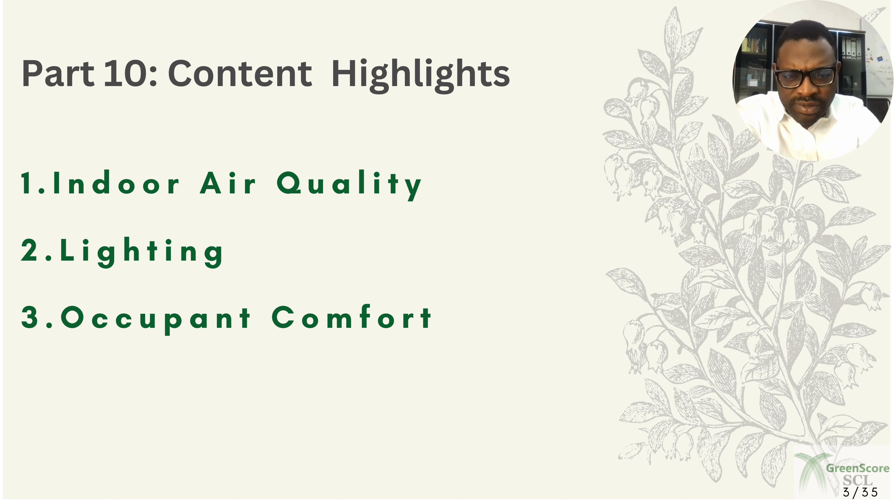For our content under this subject, we will consider indoor air quality, lighting as a subject, and also occupant comfort. So let's look at the overview.

For indoor environmental quality, the goal is facilitating health and well-being. This is a crucial factor when it comes to designing indoor spaces because a number of parameters such as air quality, lighting, thermal control, acoustic design, which has to do with sound, and occupant comfort are considered. These strategies are aimed to promote the health and well-being of everyone that interacts with that environment.

This is particularly important because with people spending 90% of their time indoors, the quality of that environment would affect their health, their wellness, and their productivity significantly. Meaning that if the indoor environmental quality design is poorly done, it will lead to reduced productivity, increased absenteeism, and decreased building value.

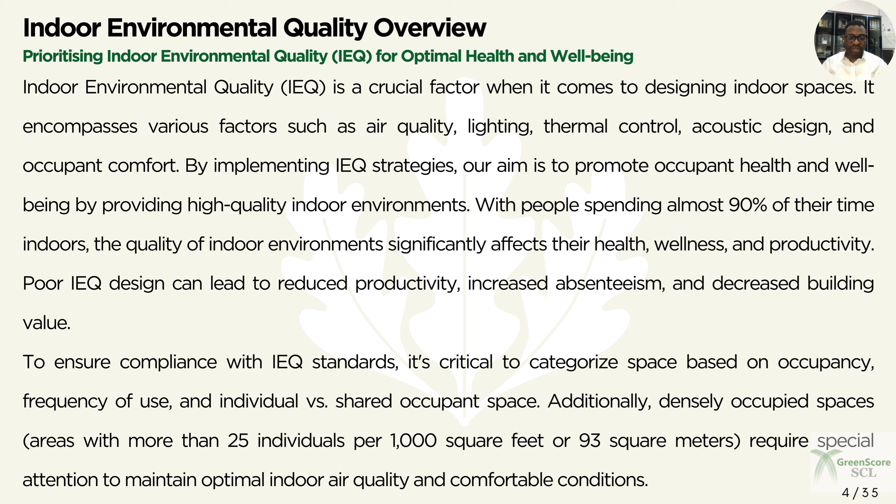And predictably, the triple bottom line benefits include personal comfort enhancement by maximizing natural daylight, natural ventilation, reducing CO2 and pollutant levels within the spaces, and of course, promoting cleaner and volatile organic compound free environments.

Economically, initial costs may be incurred, but you're able to mitigate expenses through proper allocation of thermal comfort and lighting controls, which decrease your expenses associated with replacing contaminated materials. So it's a win-win at the end of the day.

Socially, occupant health is protected, productivity levels are increased, and absenteeism is almost eradicated.

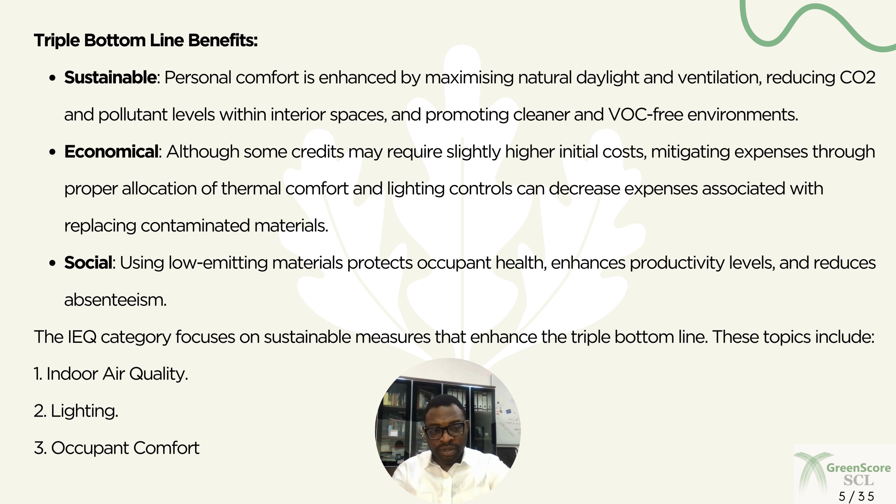The IEQ category focuses on sustainable measures that enhance the triple bottom line. The subject will include indoor air quality, lighting, and occupant comfort. So we'll take them now, topic by topic, as we progress with this lecture.

So let's start with indoor air quality. Maintaining indoor air quality is vital for ensuring the comfort, the health, and the productivity level of building occupants. In achieving this, the goal is to limit pollutant sources, provide good levels of fresh air, and follow the ASHRAE standards for the ventilation rate procedure.

Despite the higher energy consumption needed to achieve these standards, it's a necessary trade-off for ensuring a cleaner indoor environment that positively affects people's health and well-being.

It's also important to know that some areas in our buildings are more prone to hazardous substances and contamination, which means they will require special treatment to avoid exposing building occupants to polluted or contaminated air.

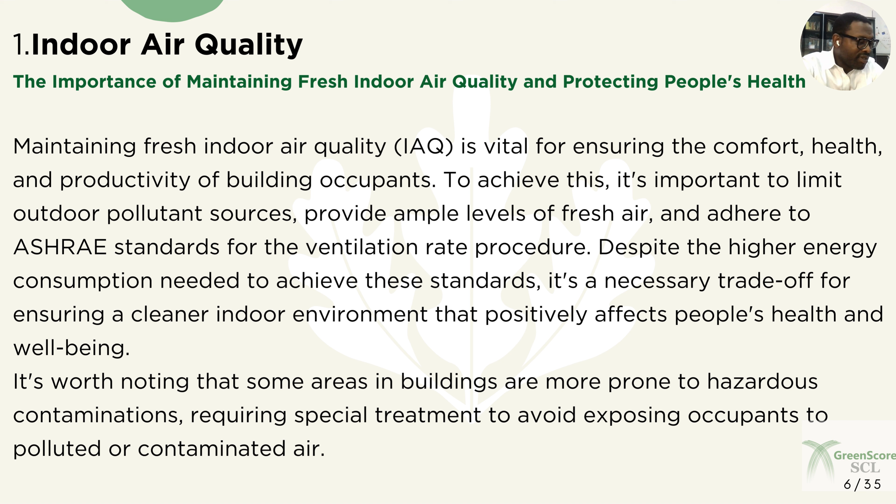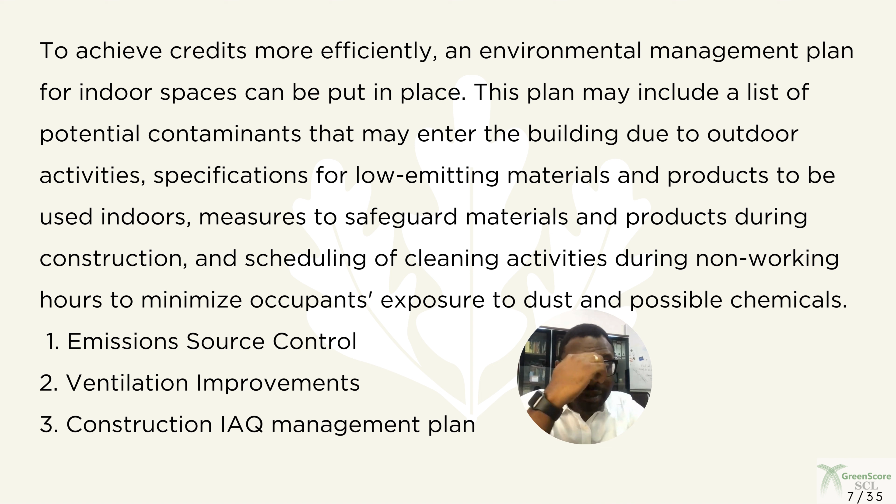To achieve credits more efficiently, you need to have an environmental management plan for indoor spaces that can be implemented. This plan would include a list of potential contaminants that you've identified that will enter the building due to activities around it. It will also include specifications for low emitting materials and products to be used indoors, measures to safeguard materials and products during the construction stage, and how you intend to schedule cleaning activities during non-working hours to minimize occupants' exposure to dust and possible chemicals.

So essentially, emission source control, ventilation improvement, and construction indoor air quality management plan are the major focus of indoor air quality.

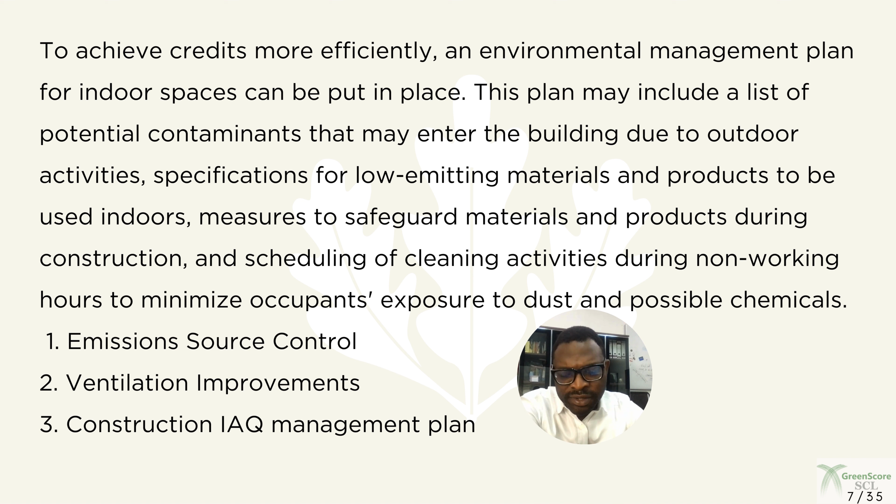Now let's talk more about emission source control. Engaging source control measures is very important for mitigating the creation of negative emissions. We need to note that every pollutant has distinct characteristics and properties coming from various sources. So below, we'll be looking at some of the most prevalent indoor pollutants.

We have volatile organic compounds, which are gaseous substances emitted from certain solid or liquid products or materials that contain various chemicals that can pose health risks. You find this in a variety of construction materials, for example paint, as well as sealants, adhesives, coatings, furniture, flooring, carpet, and so on.

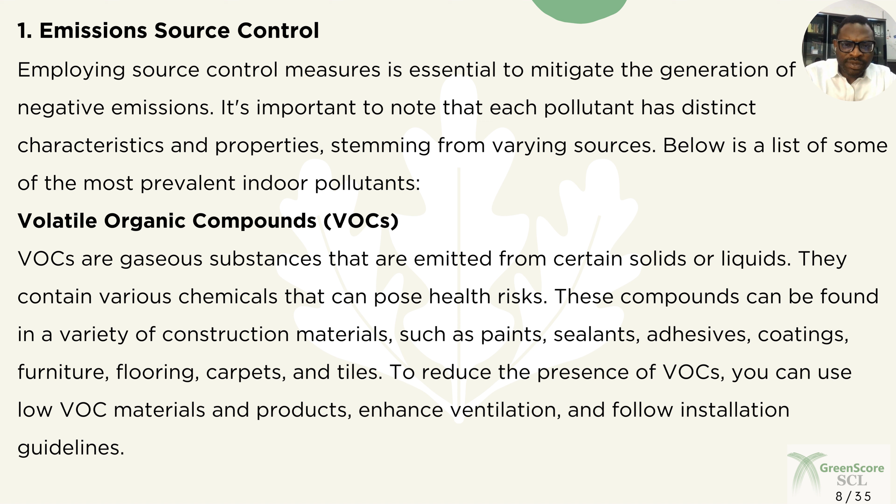So to reduce the presence of VOCs, you can identify and use low VOC materials and products, and enhance ventilation. Alright, secondly, we have carbon dioxide.

In the majority of buildings, humans are responsible for the largest chunk of indoor carbon dioxide. This is produced through respiration and metabolic processes. When these levels of CO2 are elevated, it is known to negatively affect the productivity of humans and the overall well-being. CO2 levels above 1000 parts per million (ppm) can have adverse health effects on humans.

So you need to take note of some of the references that have been made to specific figures to define what range is acceptable and what is not in LEED, so that you can speak to those questions when you come across them in the examination hall.

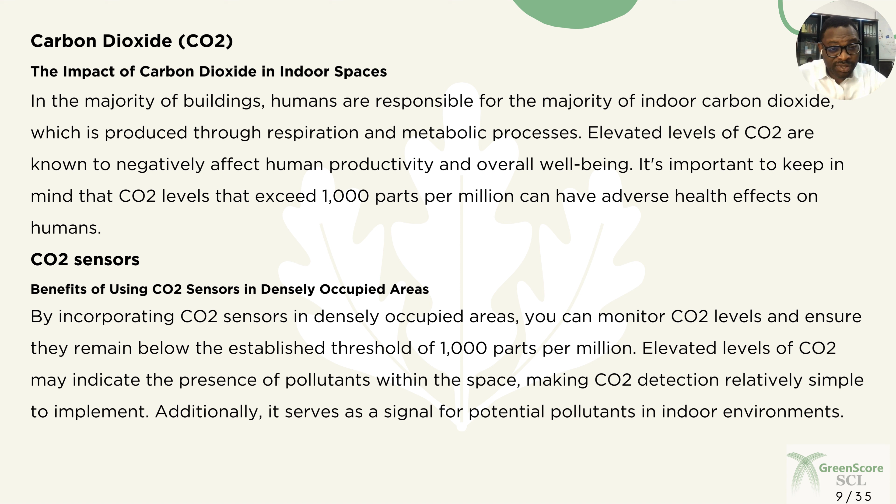And how do you control the carbon dioxide level? We have CO2 sensors, which are incorporated in densely occupied spaces to help monitor CO2 levels to ensure they remain below the threshold we made reference to, which is 1000 ppm. This is important for you to take note of.

Also, we have biological contaminants - indoor allergens like mold, bacteria, viruses, and other living organisms that can cause allergic reactions when you inhale them. They can grow in high humidity or moisture levels. We find that they often appear on interior walls, window sills, bathroom caulking, and moisture can also accumulate in insulation panels, drywalls, wood studs, plywood, and other areas.

So to reduce this, we are able to consider installing exhaust fans in rooms such as bathrooms, kitchens, and copy rooms, so that they can vent directly outside. Additionally, we can increase ventilation levels when necessary. These are part of the measures adopted to achieve this.

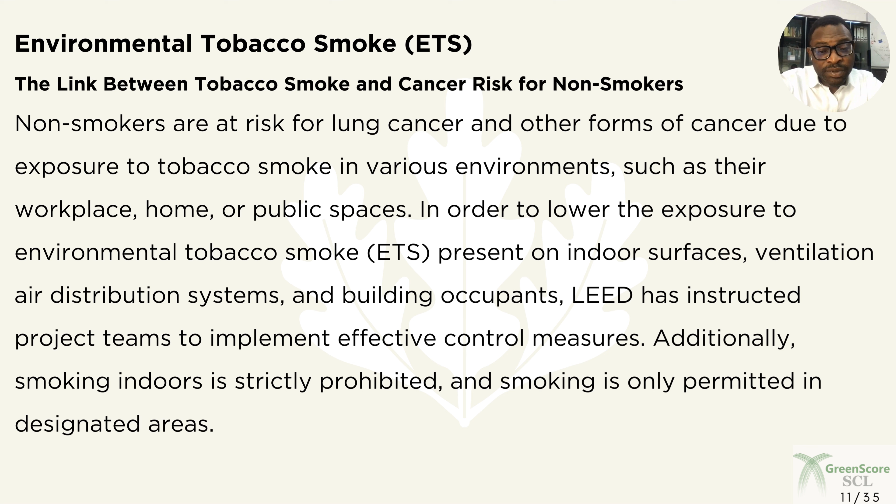Also, we have formaldehyde - a colorless, sharp-smelling gas, which is a common volatile organic compound used in the production of construction materials. This substance is linked to sick building syndrome (SBS), and it poses serious health hazards.

Formaldehyde is extensively used in manufacturing walls, especially wooden walls, cabinets, furniture. It's essentially used in creating the resin - urea formaldehyde resin.

This type of resin has raised many health and safety concerns, leading to the establishment of low thresholds for urea formaldehyde resin usage in composite wood and agri-fiber manufacturing processes. In complying with LEED policies, urea formaldehyde resin is prohibited and is replaced with eco-friendly options such as phenol formaldehyde and soy-based binders.

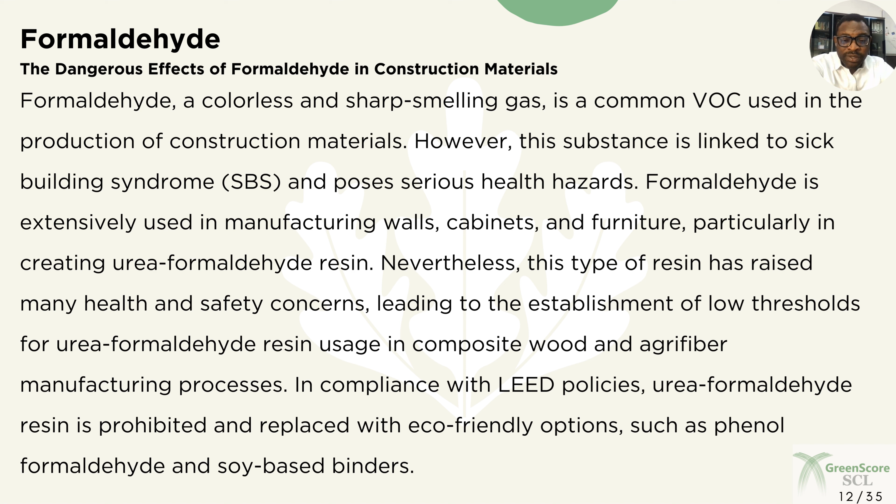So, urea formaldehyde resin is outlawed - take note of that, for the safety and well-being of building occupants. All right, let's go on.

Now we have radon. Radon is a naturally occurring gas found in soil and rocks. It's a serious health hazard known to cause lung cancer. LEED, in its mission to encourage sustainable and healthy construction practices, wants to minimize human exposure to radon gas and other soil gas contaminants.

This is accomplished by introducing radon-resistant techniques in building design and construction. For buildings already existing, a radon test is required to determine if an improved ventilation system is necessary - that is, if the result of that test exceeds 4 pCi/L.

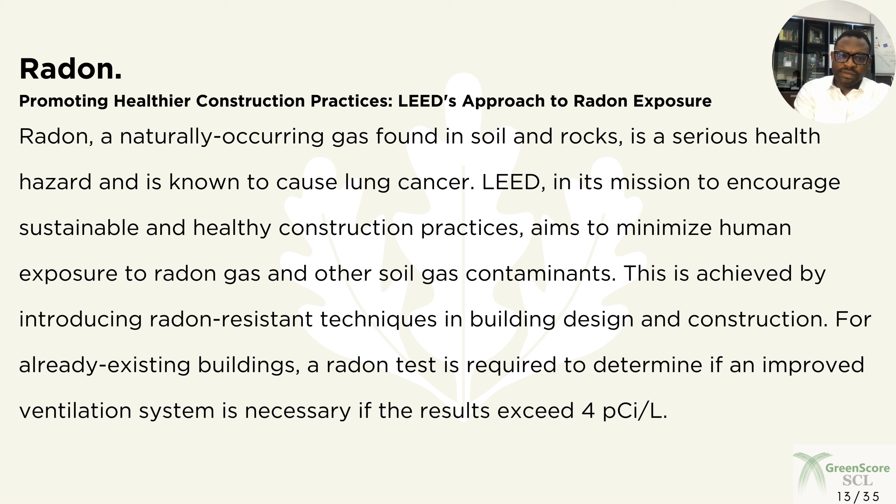Next, we have ozone, a colorless gas that reacts rapidly with other elements present in the air. Although ozone generators, home air cleaners, and office equipment are sources of indoor ozone, outdoor ozone concentrations are the primary cause. Continuous inhalation of indoor ozone can adversely affect human health.

So, to minimize exposure, it is important to filter ventilation air to remove ozone and also limit the use of materials and products that react with ozone and its associated oxidation products. Take note of this - ozone is another very dangerous colorless gas that we must design against.

Finally, we talk about PM, which is particulate matter.

When it comes to the environment, we need to consider the presence of particulate matter and the potential effects it has on the health of occupants. PM 2.5 particles in particular are so tiny that they can enter the lungs during inhalation, and they can stay in the air for extended periods. Sometimes they even travel very long distances. So that's another contaminant we need to be mindful of in our projects and building designs.

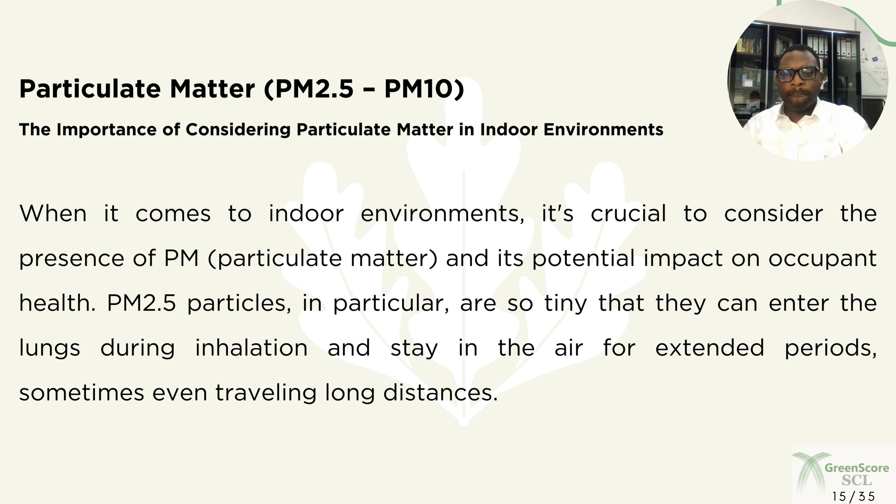Now we've talked about how important indoor air quality is to the health of occupants of the space, and we also looked at some contaminants that pose hazards and dangers to the well-being and productivity level of building and environmental occupants. Let's discuss how to improve indoor air quality.

There are numerous health benefits associated with good air quality. In ventilating our buildings, three primary methods exist: mechanical ventilation, natural ventilation, and a combination of the two.

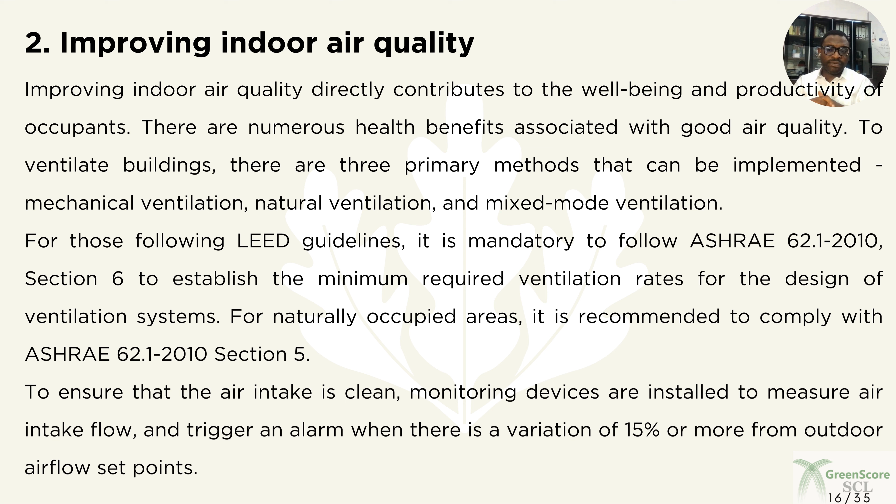To follow LEED guidelines, it is mandatory to comply with ASHRAE 62.1 2010 Section 6 to establish the minimum required ventilation rate for the design of ventilation systems. For naturally occupied areas, it is recommended to comply with ASHRAE 62.1 2010 Section 5. Take note of these two reference standards in relation to both mechanical and natural ventilation.

When we talk about enhanced air quality, this is a move to avoid the infiltration of pollutants and particulates through ventilation systems and openings, which can compromise air quality. So it is important to implement preventive measures.

Some of these measures include entryway systems, enhanced filtration media in our HVAC ducts to prevent pollutants from entering the building, and increasing ventilation rates, which is another effective strategy to introduce fresh air into indoor spaces. Also, monitoring carbon dioxide levels can provide valuable insights into pollution levels.

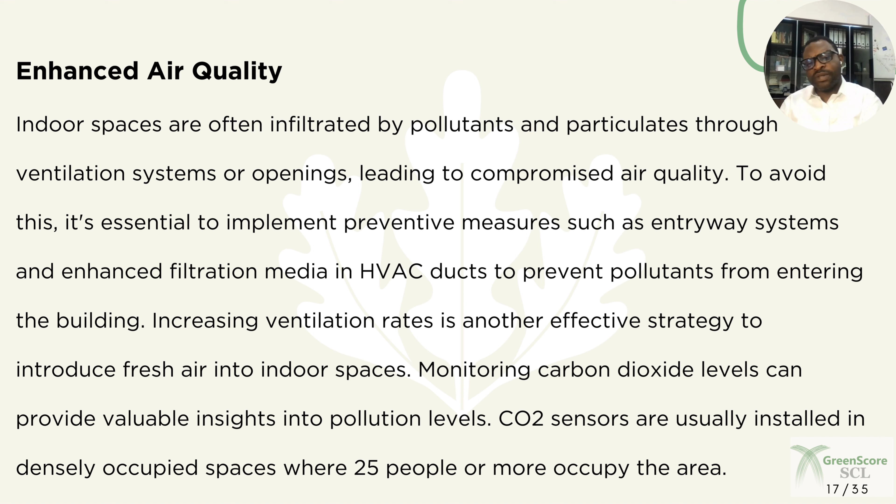CO2 sensors are usually provided or installed in densely occupied spaces - we mentioned before, spaces with 25 persons or more. I mentioned entryway systems because contaminants like dust, microorganisms, and other pollutants can easily find their way into buildings through the entryway used by occupants and visitors.

There are entryway systems that LEED recommends. They could include grills, grates, or mats that can be regularly cleaned and maintained. According to LEED, the system should be at least 3 meters long in the direction of travel and must be maintained or serviced weekly to guarantee it is functioning at optimum level.

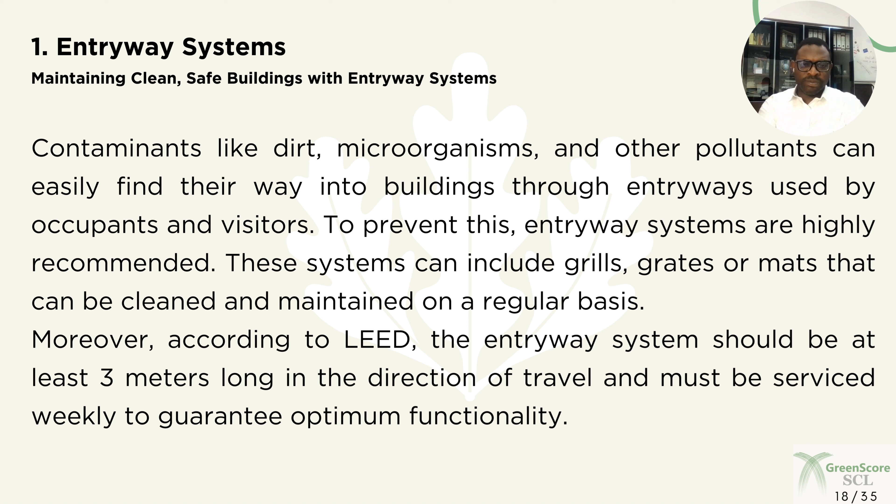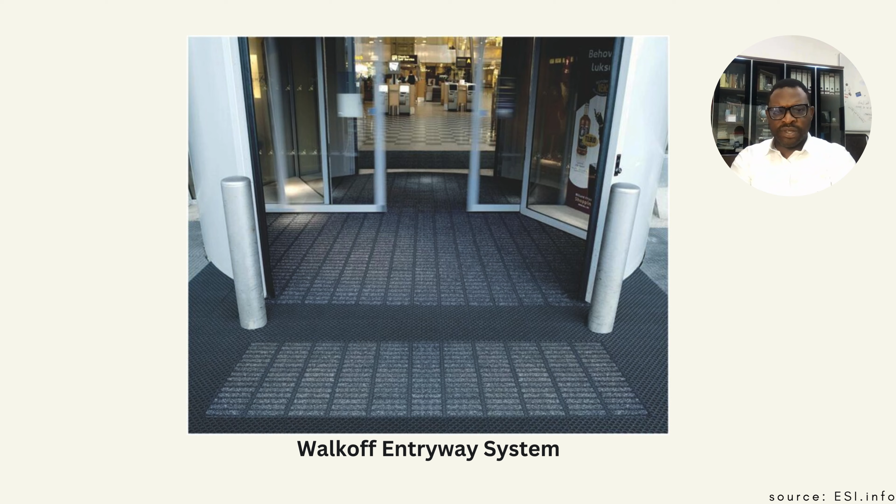This is an example of an entryway system. Obviously, you can see that this can easily be maintained and is able to arrest some dust and other contaminants away from the traffic into the space.

I also talked about air filtration media - remember, we're talking about enhanced air quality. Air filters are created to purify the air by capturing solid particles like dust, mold and bacteria. They are composed of fibrous materials, and when we select the best filter, this can lead to long-term savings because it will not need frequent changes like regular standard filters.

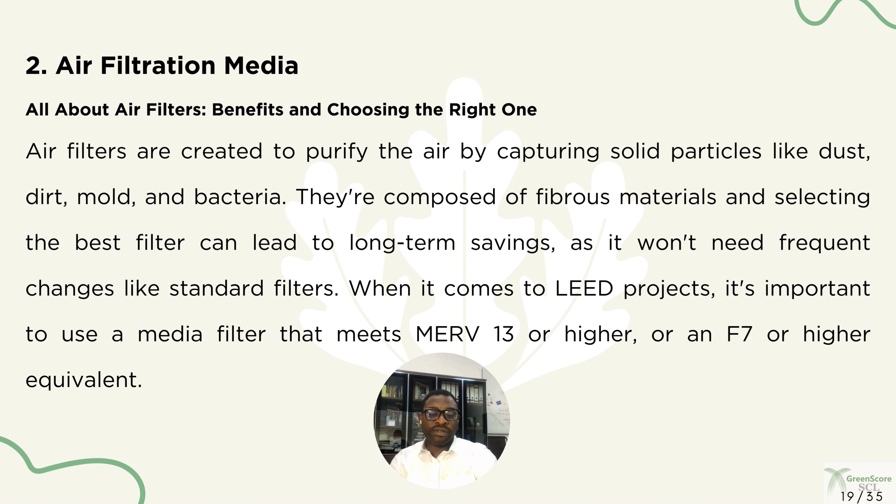Because of this, there's a reference standard recommended by LEED: it must meet MERV 13 or higher, or an F7 or higher equivalent. This is important for you to note when selecting air filters, and you should take note of this reference standard in preparation for your examination.

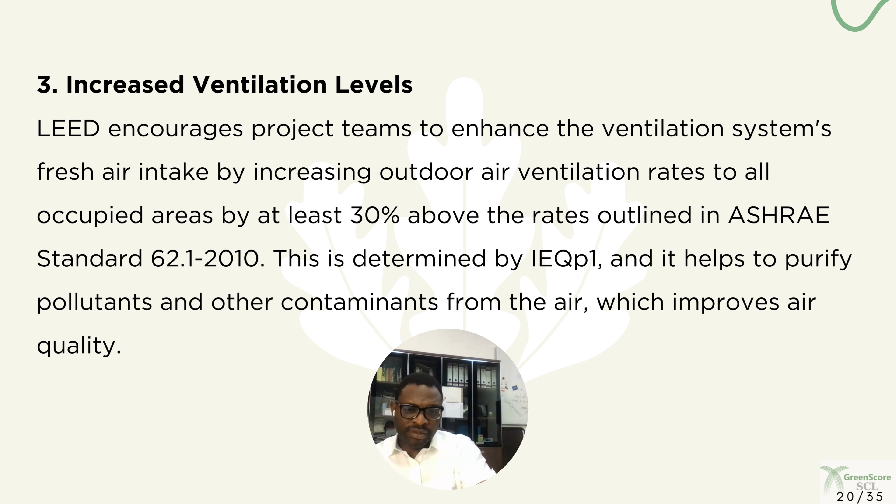Then we also talked about increased ventilation levels. It encourages project teams to enhance the ventilation system's fresh air intake through increasing outdoor air ventilation rates to occupied areas by at least 30% above the rates outlined in ASHRAE Standard 62.1 2010. This is determined by IEQp1, and it helps to purify pollutants and other contaminants from the air, which improves air quality. Take note of this expectation of LEED.

Now we have air quality monitoring devices. It is important to gain insight into the surrounding environmental conditions because this will help occupants make necessary changes to improve their surroundings. One way to do this is to detect and identify harmful pollutants. This can prompt changes such as increasing the portion of fresh air, replacing filtration media, or providing additional daylight.

Monitoring devices such as carbon monoxide alarms, volatile organic compound sensors, and CO2 sensors are important for detecting these pollutants. They can be mounted on walls or installed in ducts for optimal performance.

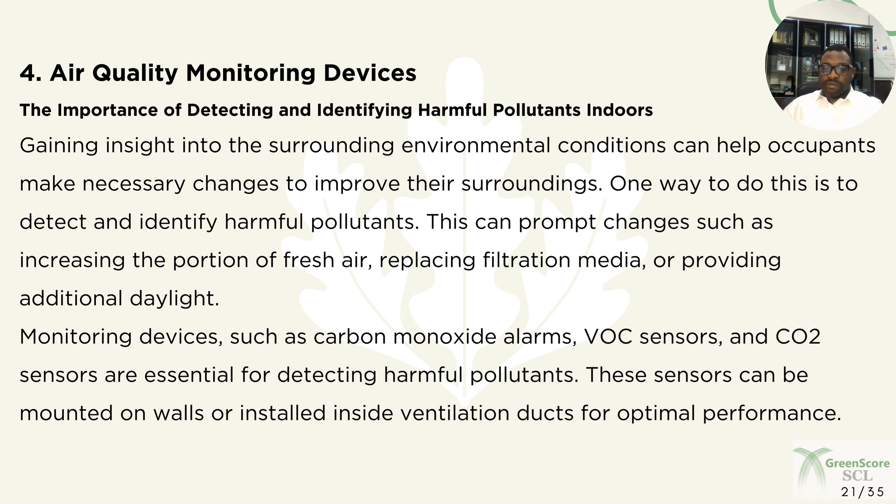Now, the construction indoor air quality management plan that we mentioned earlier is important. This is the plan that details the steps to be taken in reducing pollutants and mitigating poor indoor air quality during the construction process. One way to achieve this is by following the control measures and reference standards recommended in the Sheet Metal and Air Conditioning National Contractors Association, SMACNA, IAQ guidelines for occupied buildings under construction. The goal of this management plan should be to minimize any negative impact due to poor IAQ practices.

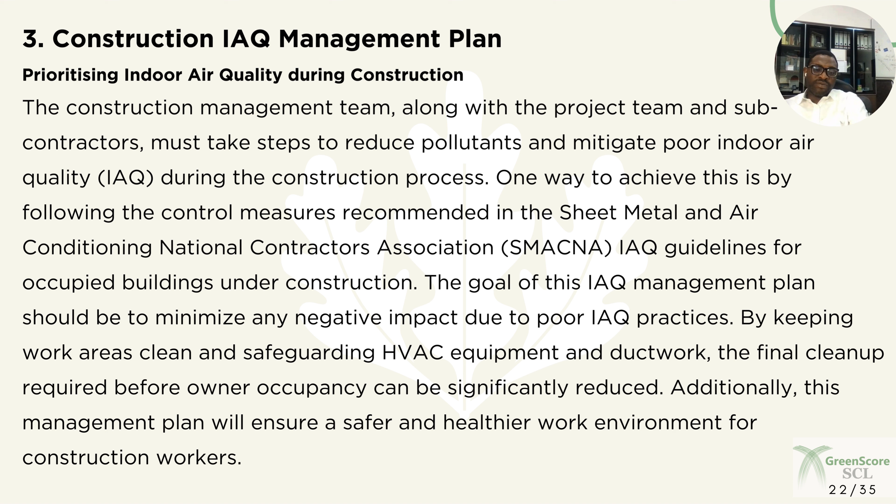By keeping work areas clean and safeguarding HVAC equipment and ductwork, the final cleanup required before occupancy can be significantly reduced. Additionally, this plan will ensure a safer and healthier work environment for construction workers. Take note of the reference standards.

So we talked about SMACNA, so let's look at the strategies contained in the SMACNA IAQ guidelines to prevent dust particulate from infiltrating the duct systems. Certain precautions must be taken. These are the guidelines: store all designated ductwork in a clean and dry location before installation.

Upon or during installation, cover all ductwork openings with plastic to avoid dust and moisture infiltration. Thirdly, use plastic coverings to prevent dust and moisture from entering HVAC equipment openings.

If the HVAC system must be operational during construction, then you must engage the use of temporary filters that meet the MERV 8 rating as per ASHRAE standard 52.2. Take note, this is not MERV 13 or F7 that we mentioned earlier, because this is making reference to temporary filters, not permanent filters. So take note and don't mix them up.

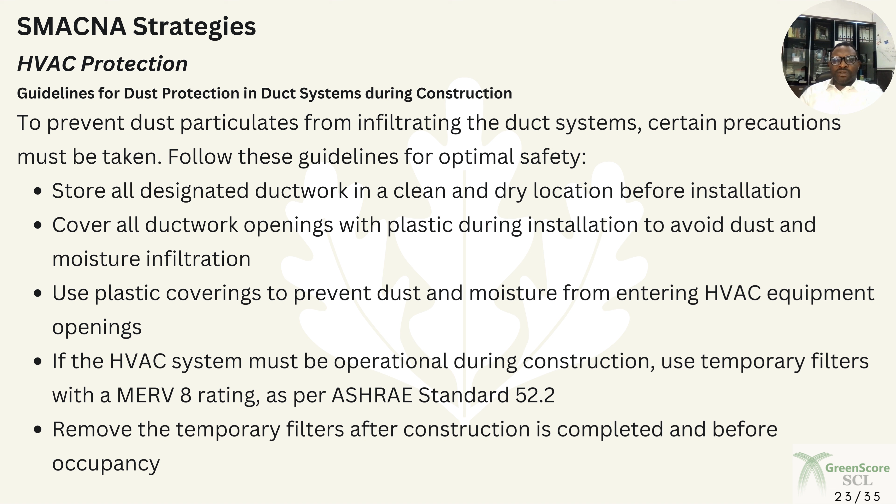Number 5: remove the temporary filters after construction is completed, before occupancy. Take note of these steps under the SMACNA strategies.

Now for source control, to minimize the release of volatile organic compounds within the site, the first thing is to identify potential sources and contaminated areas, and then take appropriate steps for either maintenance or avoidance. Most of the time these emissions come from adhesives, sealants, paints, and coatings.

One way to minimize exposure is to use 100% outside air for ventilation, allowing contaminated air to be exhausted directly outdoors during the installation of VOC-emitting materials.

We also talk about pathway interruption. This is one way to effect source control. To prevent the spread of pollution between clean and contaminated zones, it's important to deploy dust curtains, temporary enclosures, and barriers. We are talking about the activities that need to be engaged with during the construction stage of the project.

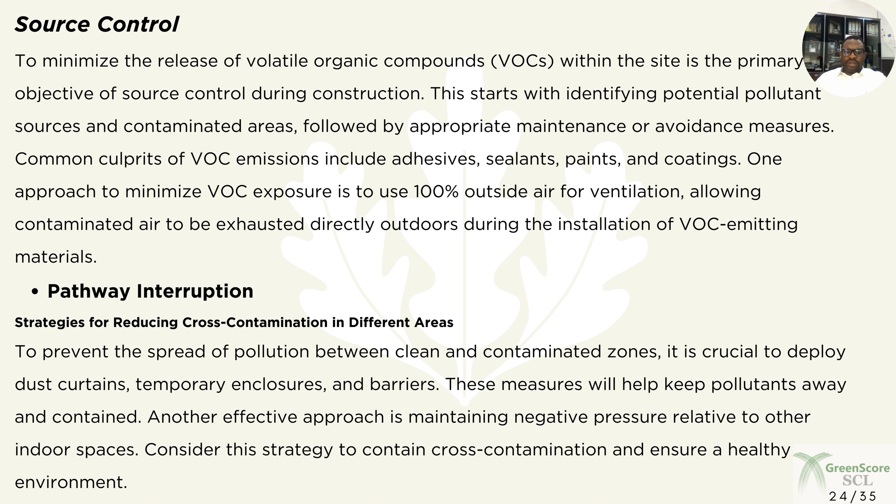Another important component of the construction indoor air quality management plan is housekeeping. To keep construction debris and dust under control, you need to maintain good housekeeping practices. One effective way to minimize the recirculation of contaminants is by using a HEPA filtered vacuum cleaner, and also employing wet cleaning agents that can capture dust particles more efficiently.

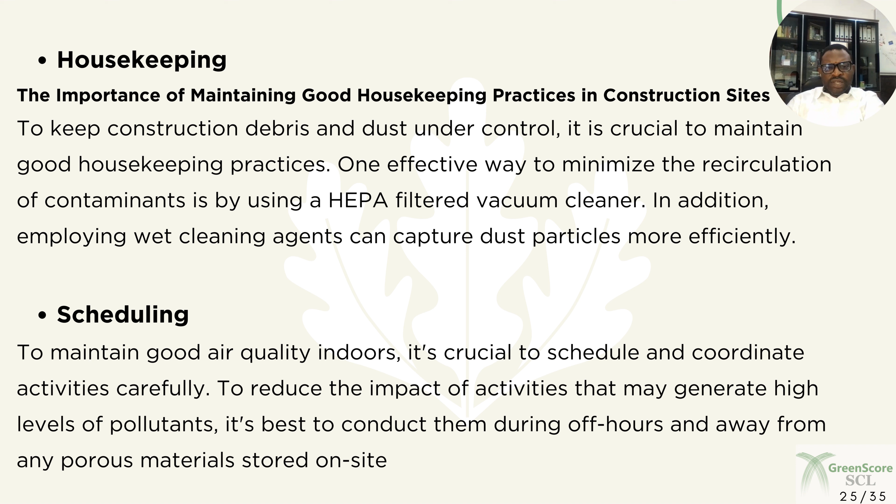It's also important to schedule activities carefully to maintain good air quality indoors. This is to reduce the impact of activities that may generate high levels of pollutants. It is best to carry out those activities during off hours. The idea is to ensure that activities are scheduled in such a way that the health and safety of the construction workers is preserved and protected. These are strategies that can be engaged to promote this.

We also have flushing out. To ensure indoor air quality meets the LEED standards, a flushing out process is required before the building is occupied, that is after construction. This process involves the circulation of air throughout the building to eliminate pollutants such as formaldehyde and volatile organic compounds.

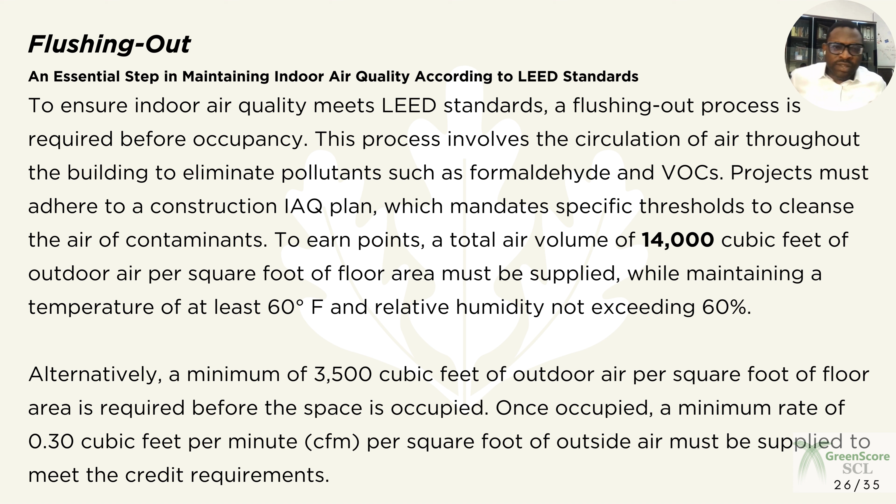Projects must adhere to a construction indoor air quality plan which mandates specific thresholds to cleanse the air of contaminants. To earn points in LEED, a total air volume of 14,000 cubic feet of outdoor air per square foot of floor area must be supplied, while maintaining a temperature of at least 60 degrees Fahrenheit and relative humidity not exceeding 60%. Take note of these figures, you may possibly come across them in your examination.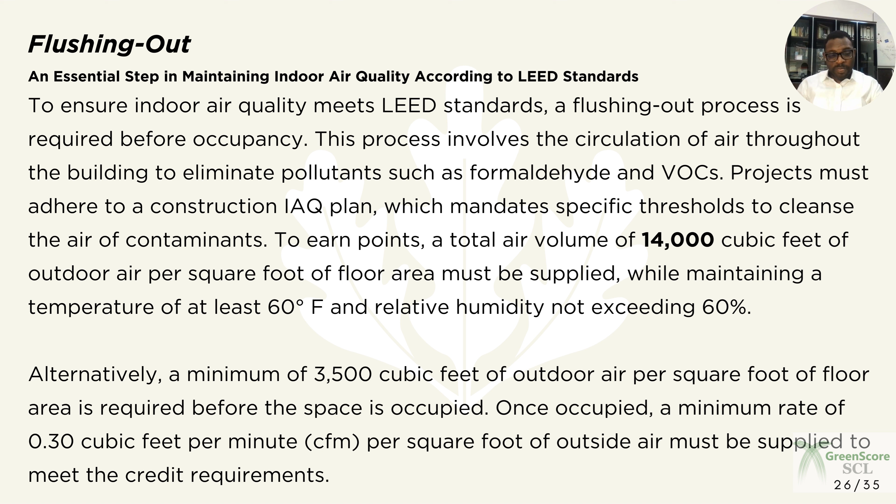There's an alternative approach to flushing out, captured here. Take note of it and ensure that you are well informed, for the interest of your project and, of course, in preparation for your examination.

We have the air quality testing, which is to guarantee the maximum permissible levels of pollutants within the space are not exceeded. This is to be done before building occupancy. This test measures the concentration levels of contaminants once construction is done, and the project team has to clearly outline the method used to identify air pollutants in the indoor space.

Formaldehyde, particulate matter, total volatile organic compounds, and so on are some of the contaminants that require analysis. Take note of that.

We have green cleaning. This is essentially about establishing a sustainable cleaning plan. If you are looking to adopt environmentally friendly cleaning practices, the first step is to develop a green cleaning policy for your building and its premises. The policy is expected to cover the procurement of cleaning equipment and materials. It should include strategies for promoting cleaning measures, how you want to do employee training, what are other safety guidelines, and opportunity for occupant feedback. It is especially crucial for existing buildings to implement green cleaning measures to ensure that safe and appropriate materials are used indoors.

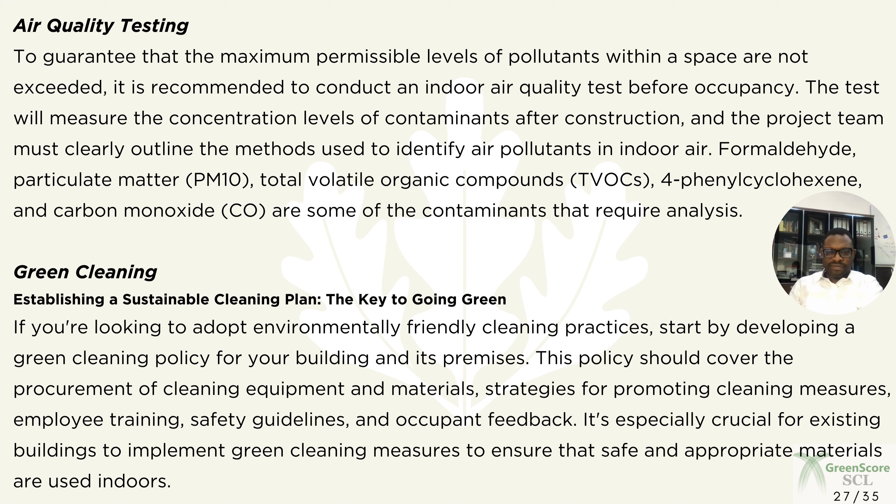Now, having exhausted the subject of indoor air quality, we will talk about lighting. The productivity and comfort of building occupants can be greatly improved by a well-designed and well-illuminated indoor environment. High-quality lighting fixtures can help to eliminate distractions and foster a sense of belonging.

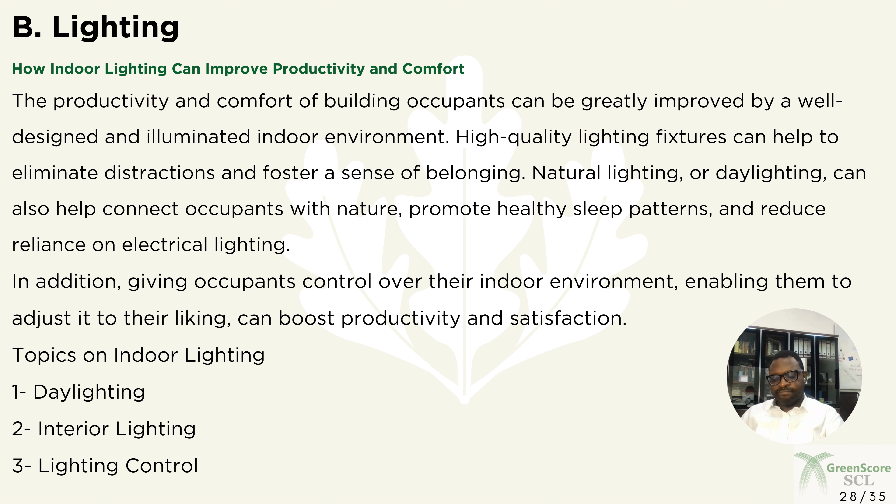Natural lighting, or what we call daylighting, can also help connect occupants with nature, help promote healthy sleep patterns, and reduce dependence on electrical lighting. In addition, when you give occupants control over their indoor environment, it enables them to adjust it to their liking, which can boost their productivity and increase their satisfaction level. So under lighting, we'll talk about daylighting, interior lighting, and lighting control. Let's start.

Daylighting is a technique that regulates the amount of natural light, direct sunlight, and diffuse skylight that goes into a structure. The goal is to reduce electricity usage, conserve energy, reduce air pollution, while also improving productivity levels. A complete daylighting system is not just about windows and skylights, it also includes a lighting control system that responds to ambient lighting levels.

Direct sunlight that goes into a building's openings causes glare and excessive heat gain, so this makes it unsuitable for interior lighting. Skylights, on the other hand, provide desirable natural light that is evenly distributed and free of glare and direct sunlight. It's crucial to know that the availability of skylight is dependent on environmental conditions, such as the sky and atmosphere.

So these are all the measures that constitute daylight. Massing and orientation: daylight is crucial for passive architectural design because it imparts visual and thermal comfort. Efficient daylighting involves optimizing larger structures for lateral window illumination and promoting expansive views through streamlined profiles, central courtyards, and taller windows. East-west building orientation minimizes glare and ensures consistent daylight utilization. This talks about how the management of building mass and orientation can promote lighting and thermal comfort. Okay, let's go ahead.

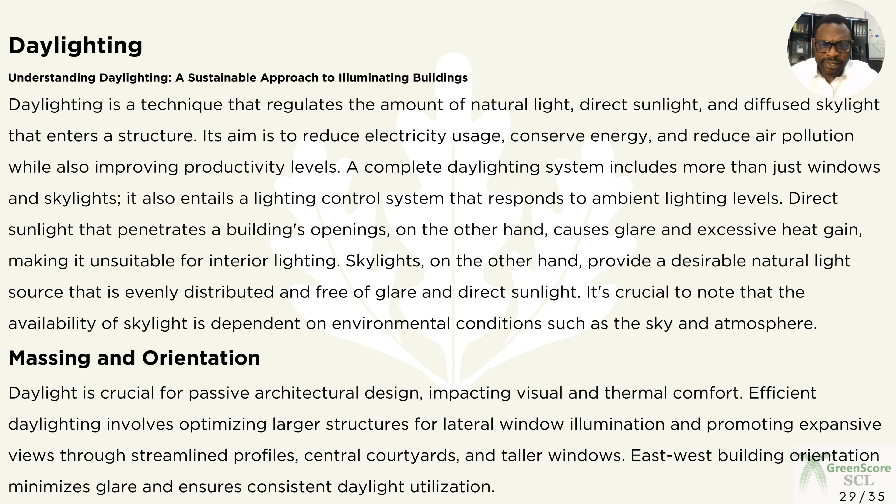We have skylight and solar tubes. Skylights on rooftops increase indoor natural light, promoting a daylight-dependent healthy environment. Safety glazing is also recommended, and understanding properties like U value, shading coefficient, and visible transmittance can enhance thermal and optical performance.

Solar tubes, another daylighting system, capture sunlight and brighten indoor spaces while reducing electricity use. You're going to see a picture of what this looks like in the next slide. These are ideal for areas like corridors, stairwells, bathrooms, and closets where traditional skylights may not be feasible.

You also have light shelves. This is essentially to control glare from direct sunlight. Light shelves are horizontal surfaces that reflect light upwards, reducing glare while improving light uniformity. It's important to know that the choice of materials for some of these measures will depend on structural strength, ease of maintenance, and other considerations that may be peculiar to the building owner, client, consultant, or designer.

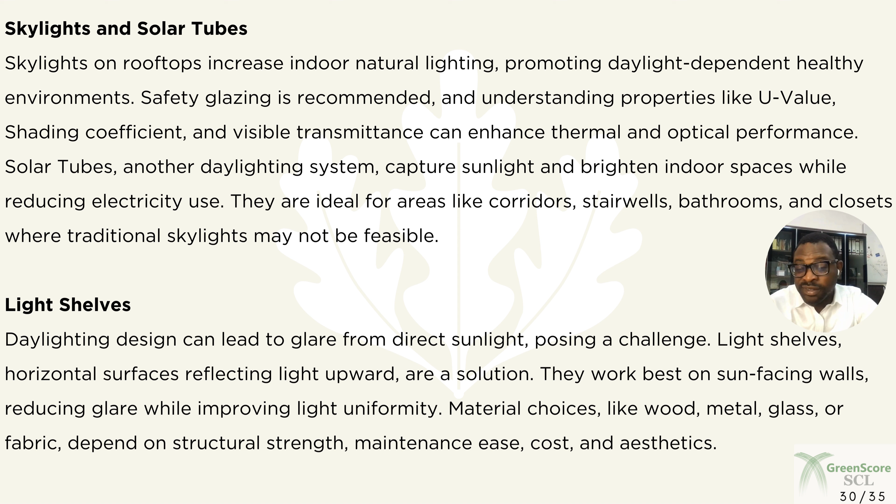You can see some pictorial representation of what light shelves look like, and of course what a solar tube installed on the building roof looks like. Okay, so let's make progress.

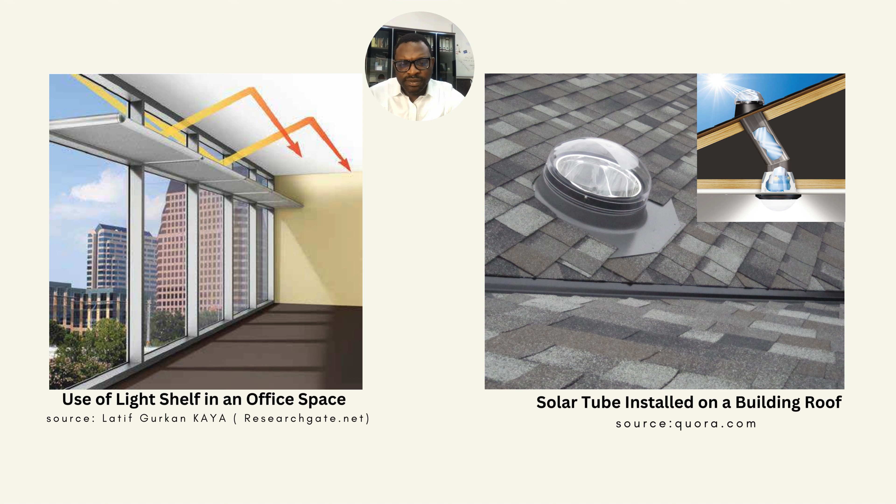Daylighting simulation is a scientific management of natural light to reduce artificial lighting, lower carbon emissions, thereby improving occupant wellbeing. This involves computer-based calculations that assess natural light levels under different sky conditions, providing aid to architectural design. Factors considered include direct solar penetration, illuminance distribution, and so on. Integrating this process with building information modeling tools allows us to have precise adjustment to window-to-wall ratios during the conceptual design phase, thereby optimizing comfort and improving energy efficiency.

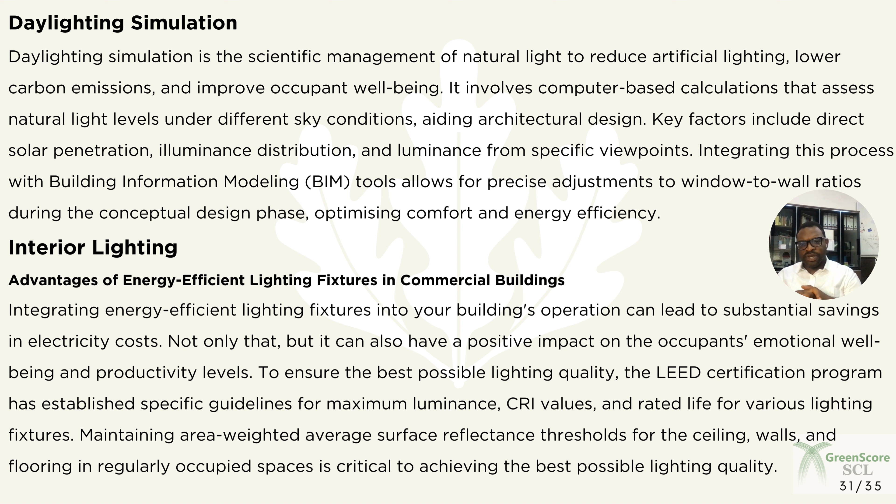So the last subject under indoor environmental quality is occupant comfort, like I mentioned. Architects prioritize people and their activities when designing buildings. They aim to create spaces that are comfortable, healthy, and safe for occupants to carry out their tasks, whether work, family related activities, or sporting activities. This design must prioritize productivity and well-being by providing the best possible environment to its occupants.

Green design principles play a critical role in creating sustainable structures that promote occupant comfort while minimizing adverse environmental effects.

Thermal comfort requires that we regulate temperature, humidity, airflow, and radiant sources to ensure individuals do not feel relatively hot or cold. There must be that state of contentment with thermal comfort of the space. It's subjective, so it makes it difficult to quantify. But this relies on factors such as temperature, humidity, radiant temperature, air velocity, metabolic rate, and so on, and this varies from person to person based on their physiology or state of health. But the goal is we must be able to take everybody to that state of relative contentment.

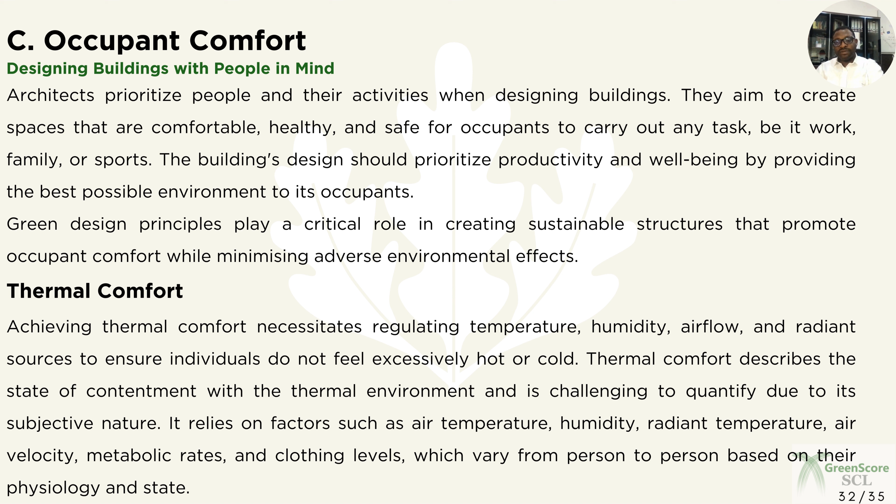So when designing for thermal comfort, six crucial factors must be considered: metabolic rate, which is the energy generation by the human body; clothing insulation, which talks about the degree of thermal insulation a person's attire provides; air temperature, which relates to the temperature of the air surrounding the individual; radiant temperature, which is the weighted average of all temperatures from surfaces surrounding the individual; air velocity, the rate of air movement given distance over time; and relative humidity, which signifies the percentage of water vapor present in the air.

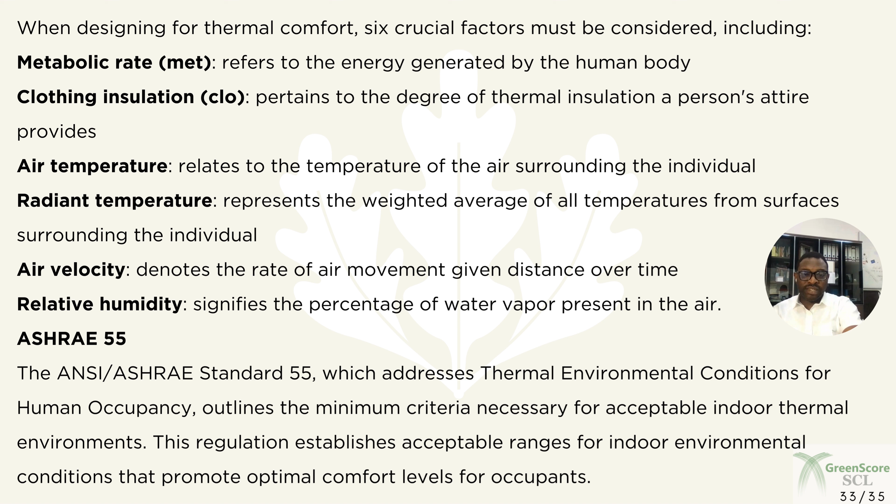The ANSI and ASHRAE Standard 55, thermal environmental conditions for human occupancy, outlines the minimum standard necessary for acceptable indoor thermal environment. Take note of that standard, ASHRAE 55.

Now, temperature control, as we gradually run up. Like I mentioned, temperature regulation is crucial for maintaining a comfortable environment. It involves detecting and measuring temperature variations in a given area and adjusting it to the desired temperature. This capability allows occupants to control the air temperature, radiant temperature, air speed, and humidity in a shared or individual space. One of the most common methods of regulating temperature in a room is the use of a thermostat, which continuously evaluates the current room temperature and adjusts the heater or air conditioner to raise or lower the temperature as per the user settings.

The next part of occupant comfort is acoustic comfort. This is because we need to cancel out unwanted sounds which can disrupt and intrude on indoor spaces. There are different solutions proposed, and LEED has also established thresholds for proper acoustic design in classrooms, which is geared towards facilitating communication between teachers and students.

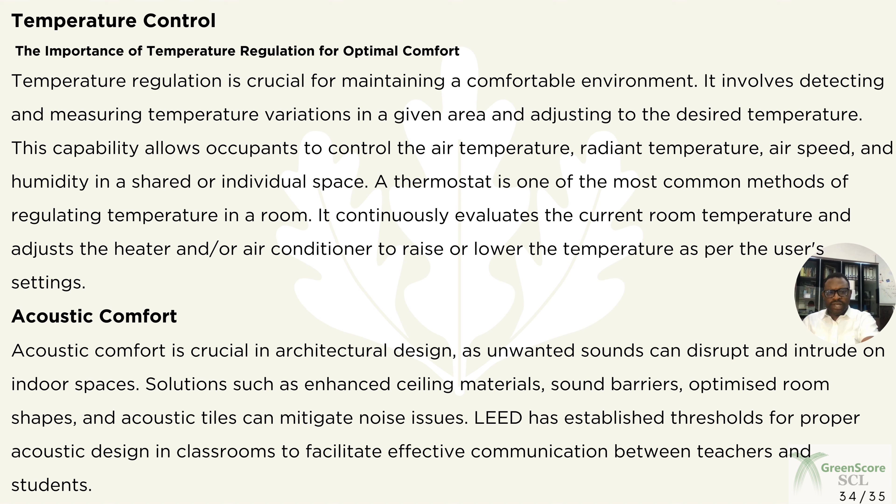And finally, we talk about visual comfort. So thermal comfort has to do with heat levels, acoustic comfort has to do with sound levels, and also visual comfort. Visual comfort is also crucial for a comfortable and productive environment. Providing sufficient, well balanced, and high quality lighting, as well as access to good views, can be achieved through incorporating natural daylighting with efficient lighting fixtures and controls. Quality views help to establish a connection between the occupant and the natural world. Factors like direct line of sight and unobstructed sight contribute to the quality of views.

In all, there must be a way to measure occupants' satisfaction with their indoor surroundings, and this is by conducting a survey. The answers to the questions posed are then used to evaluate the building's heating, ventilation, air conditioning, acoustical, lighting, and cleaning systems. The results can also provide insights on how to improve these systems, ensuring that the building occupants are comfortable. Feedback is very essential to driving improvement.

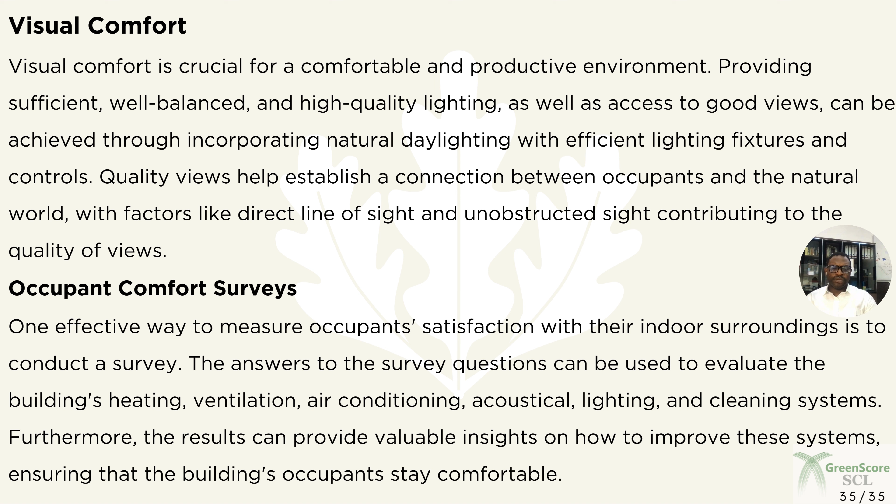So that's the lecture for indoor environmental quality.